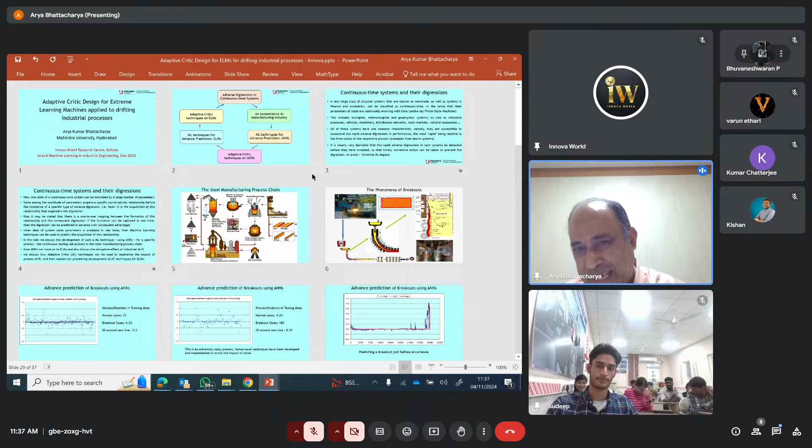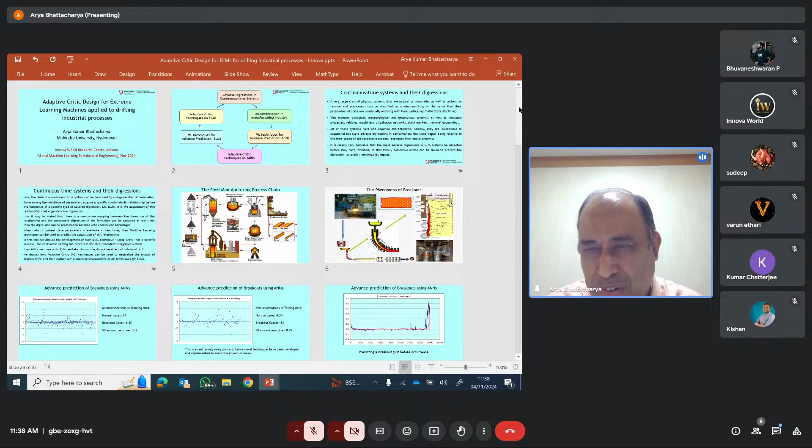I would just like to start by saying that in this presentation there are actually two parts. The first part deals with, although this is the beginning of the presentation, I'm going to start with something which is coming towards the last quarter of the presentation, which talks about generalities in application of artificial intelligence in manufacturing. Then I will come to a specific instantiation of this in a specific example, which I think you'll find interesting and also quite informative. So let me start.

So here we're going to talk about application of AI in manufacturing. Before getting into that, I think we should all first have an understanding of what AI implies.

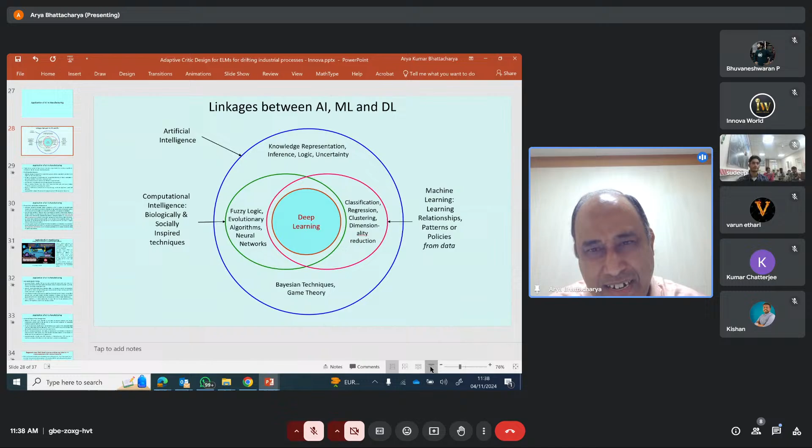In this diagram, we have the outermost circle, which is artificial intelligence, and you see that it is colored blue. The border is blue, and that includes certain elements which are subsets of that bigger set. And those are some elements which are not within those smaller subsets, like knowledge representation, inference, logic, uncertainty, Bayesian techniques, game theory, and quite a few others.

The rest of the matter, there are two elliptical subsets: one colored pink is machine learning, and the other colored green is computational intelligence. You also see them overlapping, and in the overlap there's something called deep learning. So now you understand what deep learning is, which is flashed around the media all around the place.

In machine learning, basically we are learning relationships, patterns, or policies from data. Here we talk about classification, regression, clustering, dimensionality reduction, and so on and so forth.

Computational intelligence are basically biologically and socially inspired techniques—you can say naturally inspired techniques. This involves areas like fuzzy logic, evolutionary algorithms, neural networks, and a few others. Deep learning is something which deals with neural networks and data, so it is the overlap or intersection of computational intelligence and machine learning.

Let's proceed further. I would also like to say that generally the organizers have a policy that probably questions are only towards the end, so I don't want to violate that policy. But normally, as a teacher, when I take class, I tell my students to fire questions whenever they find something they're not understanding, instead of keeping it in their stomach. Anyways, I think that will not work here based on the organizer's policy.

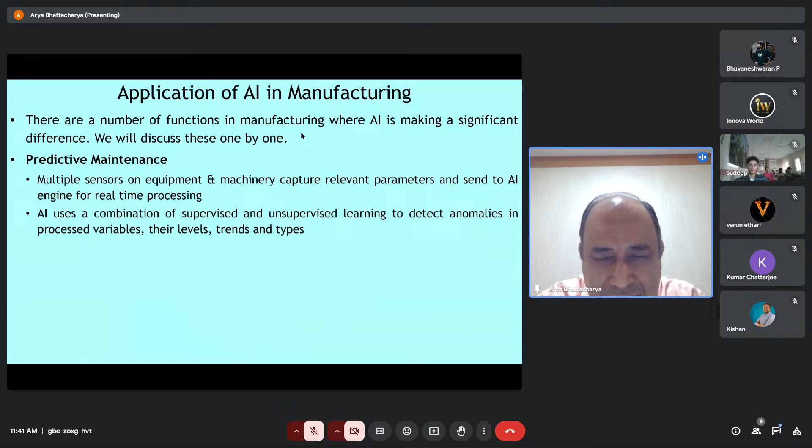I have not discussed what supervised and unsupervised learning are—I think we'll skip that, because if I start on it, it'll take the whole day. The generated values from either of these two types of learning are used at three different analytical levels.

At the lowest level, it enables monitoring of all equipment and machinery. Point number two, it predicts failures, their time in the future, and their type, and hence enables corrective maintenance precisely when needed. When we predict failures in the future, that is actually called prognostics.

Prognostics is different from diagnostics. Diagnostics is analysis when something has already happened. Prognostics is predicting what is going to happen and when it is going to happen. Finally, it facilitates an optimal maintenance strategy across all equipment, personnel, and costs, expected to reduce about 10% annual maintenance costs and 20% of equipment downtime.

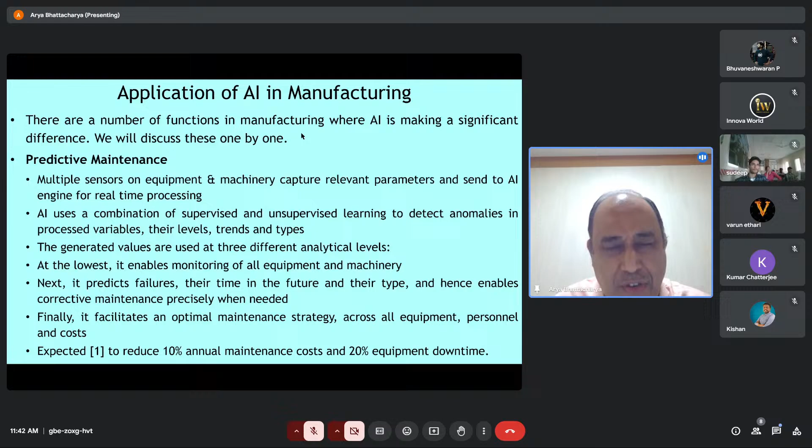I would just like to add, by the side, that when we talk of prediction, we predict not only machinery—we also predict the condition of processes. We'll talk about these as we go along.

Productivity and quality enhancement: individual operating processes within a production chain in process or manufacturing industry can have operating conditions or operating regimes of high productivity and product quality, of low productivity and low product quality, accompanied by instability and various intermediates. Each of these regimes of operation is characterized by specific combinatorial relations between different running process parameters.

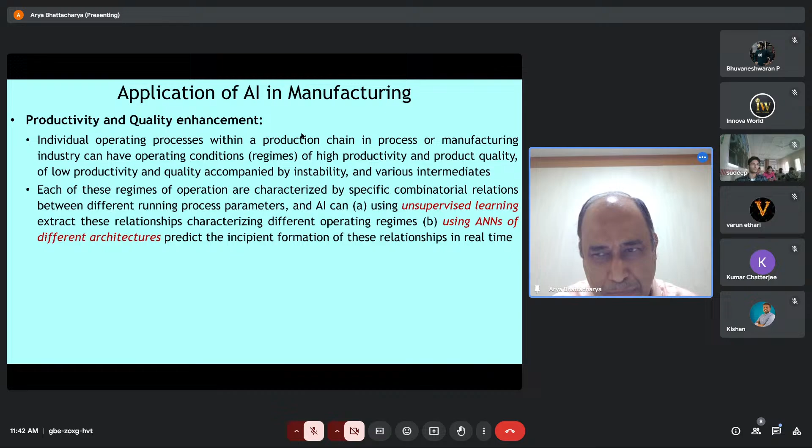AI can, using unsupervised learning, extract these relationships characterizing different operating regimes, and using ANNs of different architectures, predict the incipient formation of these relationships in real time. By control and corrective actions specific to the domain of the operating process, the processes can be prevented from degrading to unstable conditions, or taken to higher levels of productivity and quality.

So here we are talking not only about processes that are going to degrade, where we predict in advance and take corrective actions. There's also an alternative where we try to find out the best operating conditions in terms of productivity and product quality, and minimize cost. So the final product quality and productivity of the complete chain depends on optimization across individual processes, where the optimal process parameters can be extracted using multi-objective optimization.

Let me stop for a moment. When I say complete chain, most of the time manufacturing is not one single unit. It can be, but then those are very small setups. Usually in manufacturing, we have a chain of processes starting with some kind of materials and ending with a final product, with many transformations in between, like links of a chain. The final product quality and productivity of the complete chain depends on optimization across individual processes or links in the chain, where the optimal process parameters can be extracted using multi-objective optimization, and the individual processes run at optimal conditions using the above mechanisms.

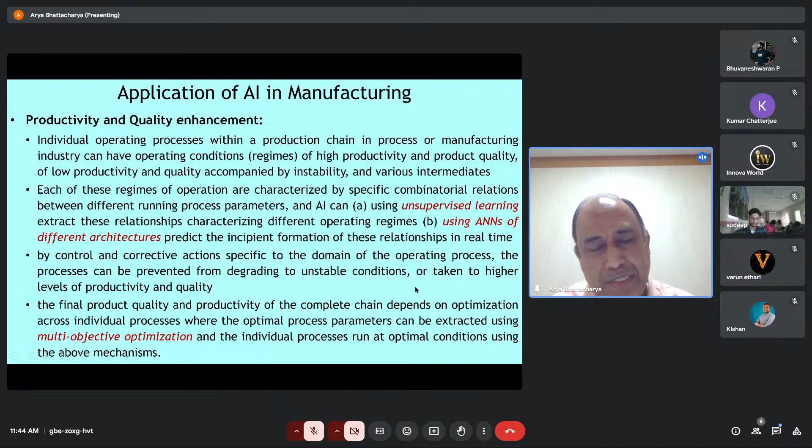Another small point we should be aware of, since we are dealing with manufacturing, is that there are broadly two classes of products. One is continuous product and the other is discrete products. If you have semiconductor chips, steel plates, or cars and vehicles coming out, those are discrete products. On the other hand, if you have oil and gas mechanisms or power being generated, these are continuous products. Just keep this in the back of your mind.

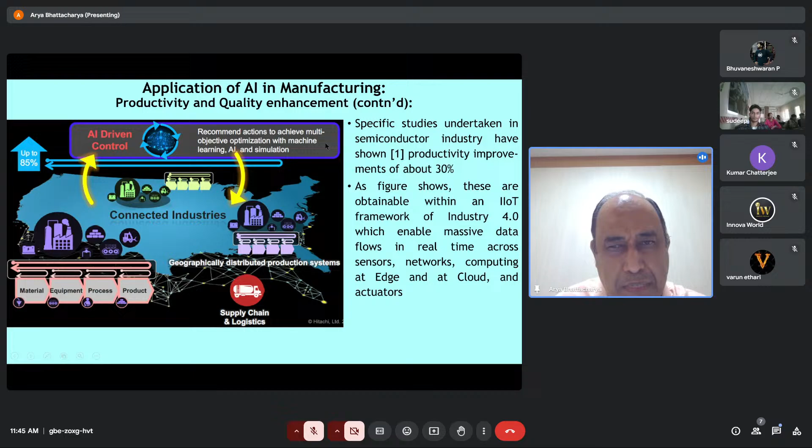As the figure shows, these are obtainable within an industrial IoT framework of Industry 4.0, which enables massive data flows in real time across sensors, networks, computing at edge and at cloud, and actuators. You see geographically distributed production systems and connected industries, with material, equipment, process, and product all supervised or controlled by AI, which recommends actions to achieve multi-objective optimization and machine learning through AI and through simulations. That's the idea I'm talking about.

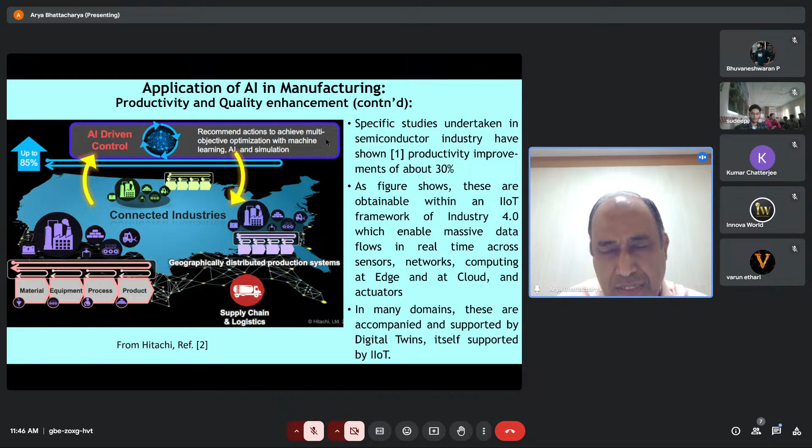In many domains, these are accompanied and supported by digital twins, itself supported by IIoT. Digital twins is another very interesting concept, but I won't talk about it here—possibly this is a good topic for a series of lectures or a workshop like this.

Then we have talked about condition monitoring, and improvement of products and processes. Then we have automated quality testing. Automated product quality testing has been around for some time now, using non-destructive visual testing of products across a range of industries.

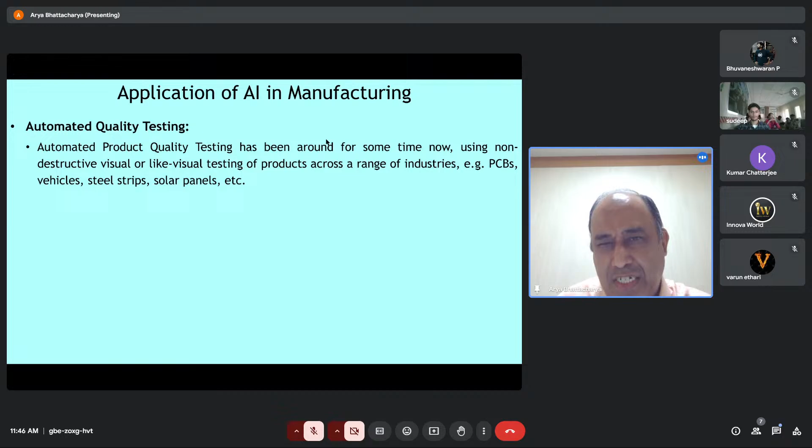Like you see with solar panels, steel strips, vehicles, and so on. Using AI, particularly deep neural nets like CNNs, it is possible to test in the production line itself for defects by abstracting away variations due to light intensity, color shades, orientation, background, etc. I don't know how many of you are familiar with CNNs.

With CNNs, you do not need to do feature engineering. You put in inputs and it automatically learns which variables are more important and which are less important. You can also have a lot of variations—for example, an image does not have to be of a particular intensity, color, or orientation. All these things are learned by the CNN automatically.

This obviates the need to take away samples for offline testing, which delays the complete process chain, and also ensures complete coverage of the product and the highest accuracies. CNNs have, since 2016, beaten human accuracy levels in image classification.

2016 is quite some time back, actually. Many developments have taken place since then.

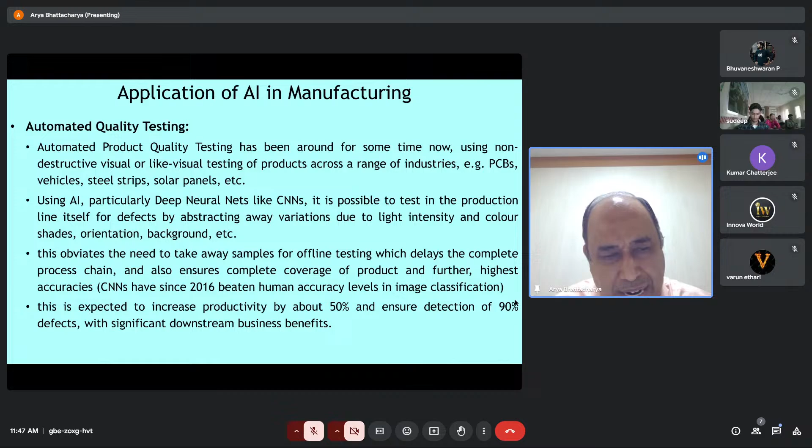This is expected to increase productivity by about 50% and ensure detection of 90% of defects, with significant downstream business benefits.

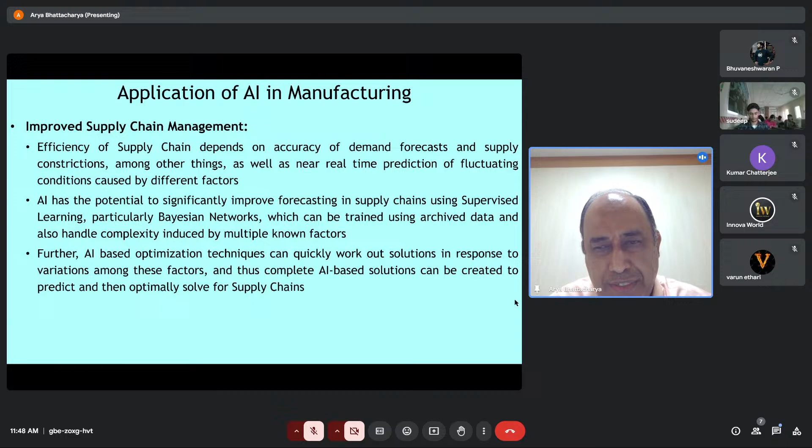Then we have improved supply chain management. Efficiency of supply chain depends on accuracy of demand forecasts and supply constrictions, among other things, as well as near real-time prediction of fluctuating conditions caused by different factors. AI has the potential to significantly improve forecasting in supply chains using supervised learning, particularly Bayesian networks, which can be trained using archived data and also handle complexity induced by multiple known factors. Further, AI-based optimization techniques can quickly work out solutions in response to variations among these factors, and thus complete AI-based solutions can be created to predict and then optimally solve for supply chains.

Expected benefits include a significant 50% reduction in forecasting error, 50% reduction in inventory, and about 65% reduction in lost sales due to product unavailability. So these are things which actually impact the producer of materials.

So now we go into something else, slightly deviant from what we have been talking about: suggested steps that manufacturing entities may take for AI implementation with maximal benefits. I don't have a complete profile of all the audience, but this would be particularly relevant for those engaged in the manufacturing industry and in operations management of manufacturing. So with the business benefits of AI implementation quite apparent, the obvious question is, how does one systematically implement AI company-wide for optimally achieving these?

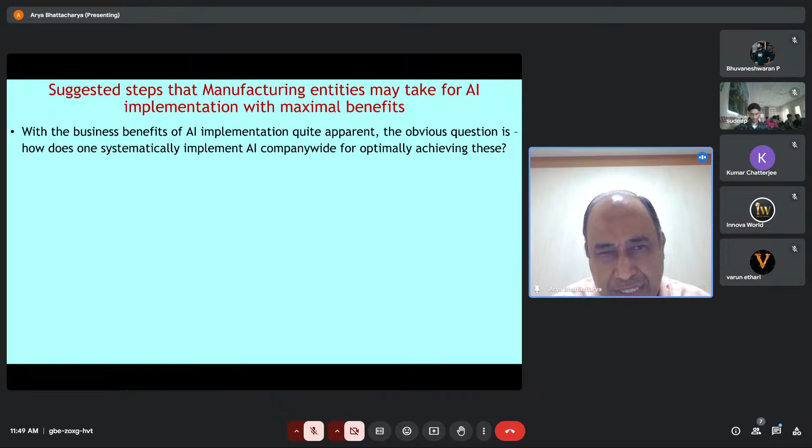For example, if you are in charge of or looking after a complete production chain of some product, whatever it may be, either continuous or discrete, as I talked about, you would like to see how you feed in artificial intelligence at different stages and extract the maximal benefits. The following 4 suggestions may be considered.

Work out a few targeted areas within the entire manufacturing process chain where AI may be first implemented, based on the discussed 4 application areas and possibly using the theory of constraints.

Now, theory of constraints is something that was propounded by someone called Eliyahu Goldratt, and he has become very famous and is a consultant for a lot of industries globally.

So the basic idea of the theory of constraints, cutting out all the other things, is that if you have a chain, and you want to maximize the productivity of the throughput through that chain, the first thing you should do is find out which is the number 1 point of constriction or bottleneck, and work around it so that that bottleneck or constriction is removed or expanded.

Once that is done, your potential or capacity of your chain has improved, and then it gets stuck at the next bottleneck or constriction. So work around that and expand that constriction. That is the way this theory of constraints is supposed to work.

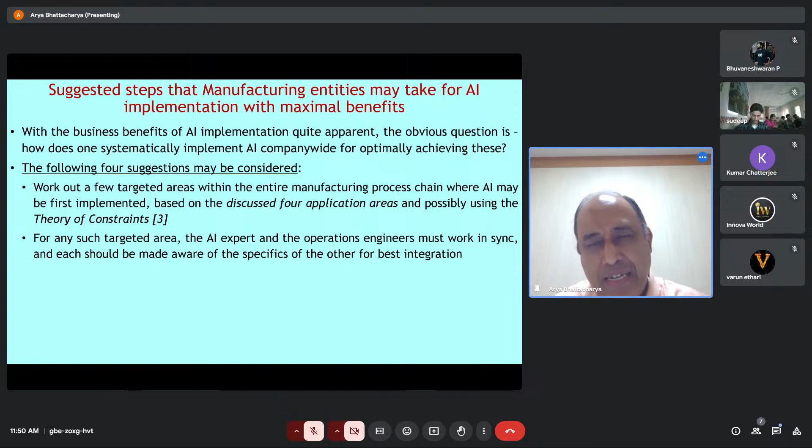So for any targeted area, the AI expert and the operations engineers must work in sync, and each should be made aware of the specifics of the other for best integration. Now, this is a very important thing. You see, one cannot really implement AI gainfully by just having an AI expert and giving it to him to try to improve a process, because a good deal of domain insight is needed for improving the process as well.

In the example that I've deliberately selected, you'll find how important it is, both for AI awareness and the mathematics and theory behind it, as well as for the domain expertise, which only the domain expert will be aware of. Only if the two work in sync can we really expect some breakthroughs. If the operations engineers alone learn AI from somewhere, they will not be able to do it by themselves either.

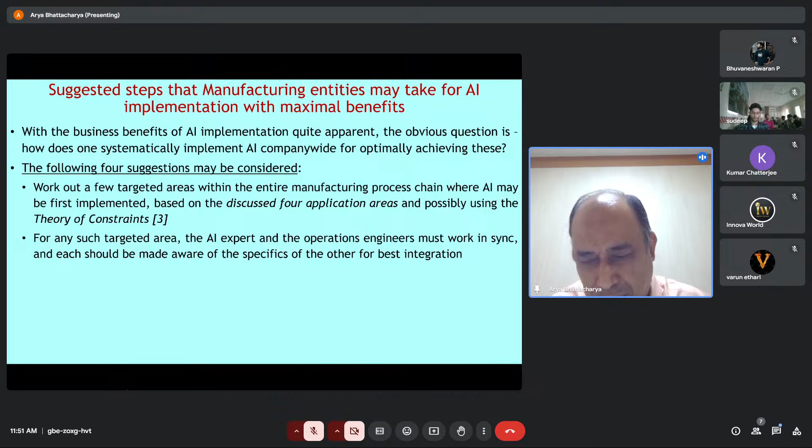Data is a critical player, and traditional relational databases will hardly help in the Industry 4.0 framework. One has to move to, I think this is now well known, like you've heard of big data and things like that. So one has to really move on to NoSQL-based frameworks.

And then aim for agility by first using simulation-based pilots, which enable faster convergence to meta hyperparameters of the AI system design, followed by online plant validation trials in safe parallel mode, and finally implementation. Usually in a running process, no one would like to take the risk of implementing a new system when the system is apparently going well, but one wants further improvement.

In this case, one actually creates a parallel implementation where the actual control or monitoring is done by the existing system, but the AI-based system is also put in place so one can compare how it is predicting or controlling versus what is actually going on. After a few months, one would take the decision whether the AI system is behaving better and replace the existing system with the better one. So these are the ways in which one actually goes about implementing AI-based systems.

Well, there's not much point in my reading through these, so let me leave this out. This is about the first part. I went through it faster than I thought — I thought I'd take half an hour, but I finished in 20 minutes.

Are there any questions about these, or am I allowed to ask the audience for any questions at this point in time?

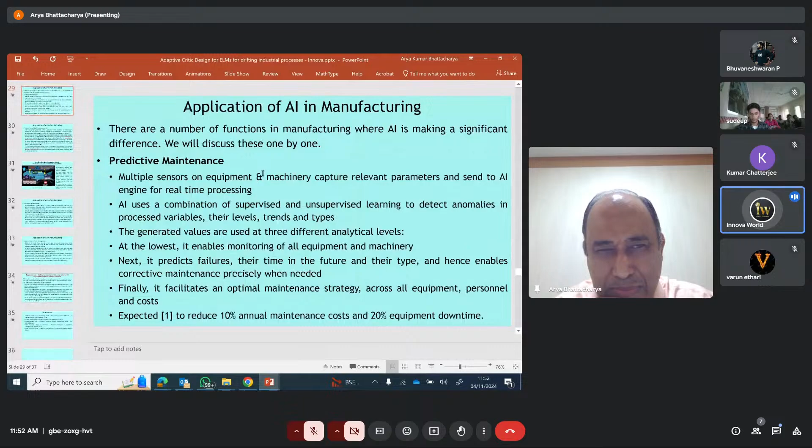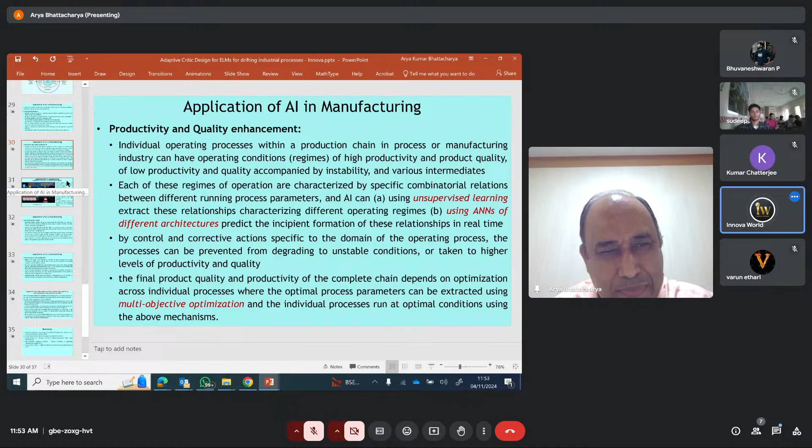Sir, half of... Hello? Yes, sir, am I audible to you? Yes, but there's a slight echo, that's all right. Actually, half of the audience are live, so you can drop a question. Meanwhile, let's wait and see whether the audience are able to answer. Okay, so my remark here is that I have finished the first part, which is the generalities of application of such machines. We don't have any question. Okay, so I'll move on to my main topic. Right, sir.

So here I'm going to talk about adaptive critic design for extreme learning machines applied to drift in industrial processes. Let's not be too floored by the kind of words used — adaptive critic, extreme learning machine, and all that. I'll gradually explain all these things as we go along.

So what do we mean by adverse digressions? When we have continuous time or dynamical systems, sometimes they tend to behave differently and it brings down their level of performance. I'll explain this in more detail down the line. In continuous time systems, which are ubiquitous across most things in the world, there can be adverse digressions, and there are ways of taking care of these.

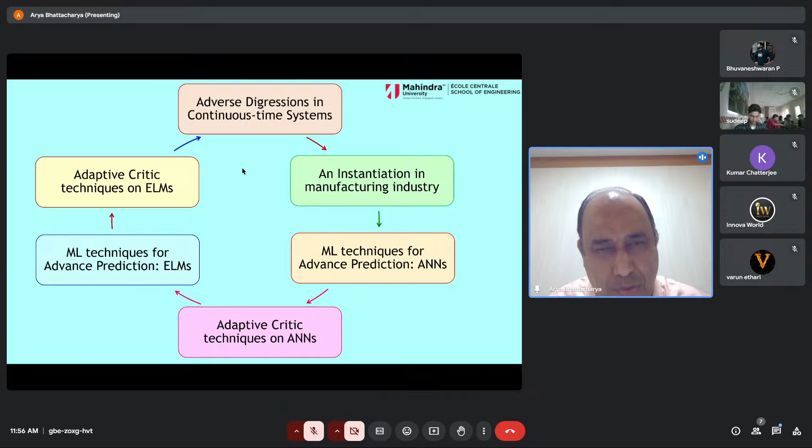Now, when this work was done, it was done for the very first time, because adaptive critic techniques did not exist in ELMs. We also filed patents and have a number of papers around this as well. So let me now get into more understandable things.

A very large class of physical systems, natural or man-made, as well as systems in finance and economics, can be classified as continuous time, in the sense that their state parameters are continually evolving with time, unlike, say, finite state machines. I hope you understand what state parameters are — basically, whenever you have any dynamical system, there will be a lot of variables associated with it.

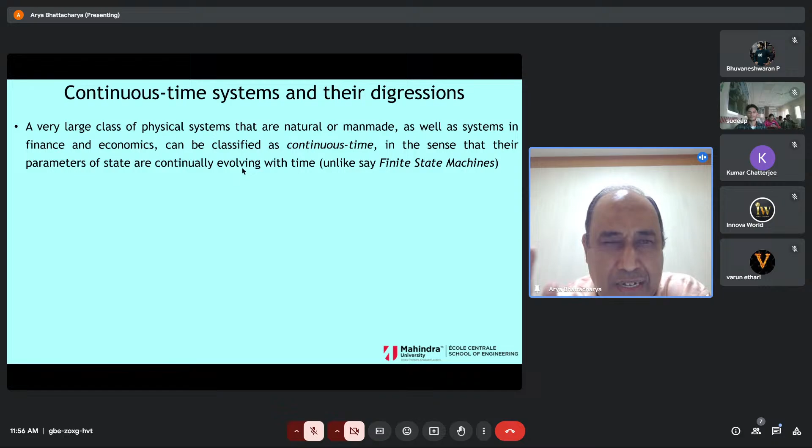If you look at the variables at any snapshot in time, they tell you the state or the condition of the particular process at that point in time. And that is why these are called parameters of state.

This includes biological, meteorological, geophysical systems, as well as industrial processes, vehicles, machinery, distribution networks, stock markets, national economies. All of these systems have one common characteristic: they are susceptible to occasional but rapid adverse digressions in performance, the word rapid being relative to the time scales of the respective process.

For example, in steel manufacturing there's an industrial process called a blast furnace - we'll have a look at that in one of the slides. In a blast furnace, the time scales are of the order of hours, or maybe 45 minutes or so.

On the other hand, we have electrical distribution grids, and there your time scales are of the order of milliseconds. So when we say all these systems are susceptible to occasional but rapid adverse digressions in performance, relative to their respective time scales - a blast furnace may get into a different state over many hours, whereas an electrical distribution grid or network can go down in just a few seconds.

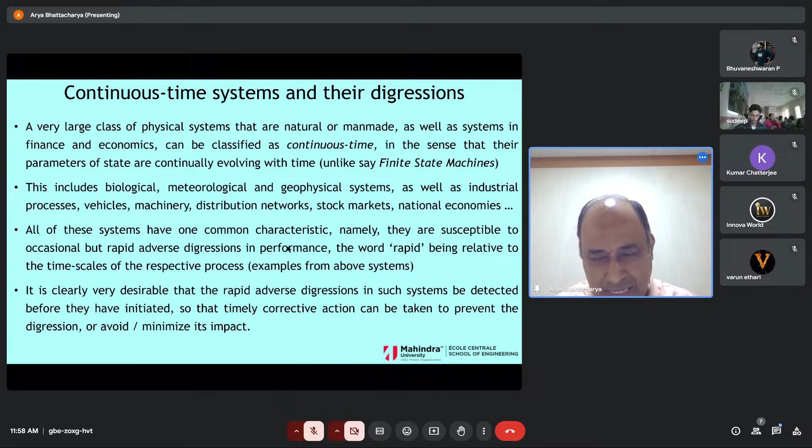It is clearly very desirable that rapid adverse digressions in such systems be detected before they have initiated, so that timely corrective action can be taken to prevent the digression or minimize its impact. I think all of this is understandable.

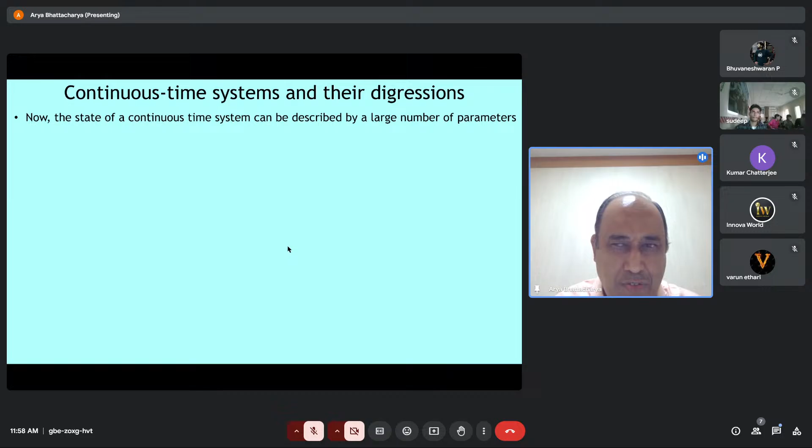Now, the state of a continuous time system can be described by a large number of parameters, and as we said, these are parameters of state. Some among the multitude of parameters acquire - now this is very important, and I think it's a bit abstract for us to think about.

Some among the multitude of parameters acquire a specific combinatorial relationship before the incipience or start of a specific type of adverse digression, that is a fault. It is the acquisition of this relationship by a subset of all the parameters that engenders or creates the digression.

I hope the part written in italics is understandable. Unfortunately, as I said in class, we keep getting feedback and I can see the faces - this is one of the major issues in online discussions, we cannot see the faces of the students. Of course here it is not just students, it's the audience.

So this is a very important thing - let me repeat it for the sake of its importance: whenever we have an adverse digression like a fault coming up, it is some of the state variables that acquire a specific combinatorial relationship that creates a specific type of fault.

Thus it may be stated that there is a one-to-one mapping between the formation of this kind of relationship and the consequent digression. If the formation can be captured - now this is again very important - if the formation can be captured in real time of the process, then the digression can be predicted in advance with consequent advantages.

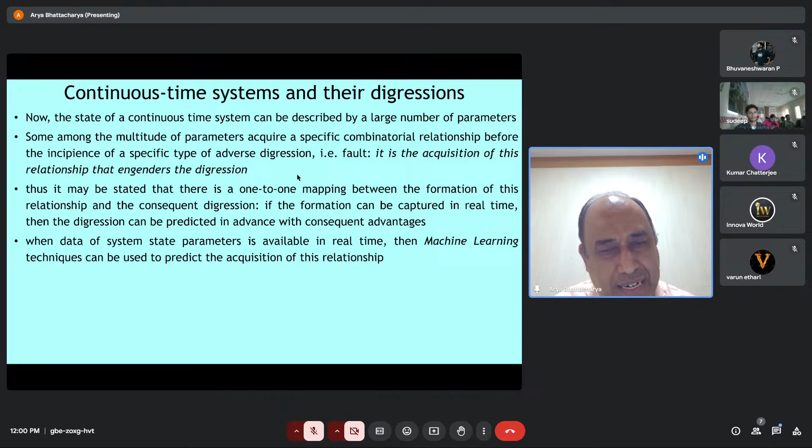When data of system state parameters is available in real time, machine learning techniques can be used to predict the acquisition of this relationship. In this talk, we discuss the development of such a machine learning technique using ANNs for a specific process - the continuous casting sub-process in the steel manufacturing process chain.

From ANNs, artificial neural networks, we move on to something called extreme learning machines, which is actually a cousin sister of ANNs, you could say, and also discuss the disruptive effects of industrial drift - we'll talk about industrial drift down the line. We discuss how adaptive critic techniques can be used to neutralize the impact of process drift, and then explain our pioneering development of adaptive critic techniques for extreme learning machines.

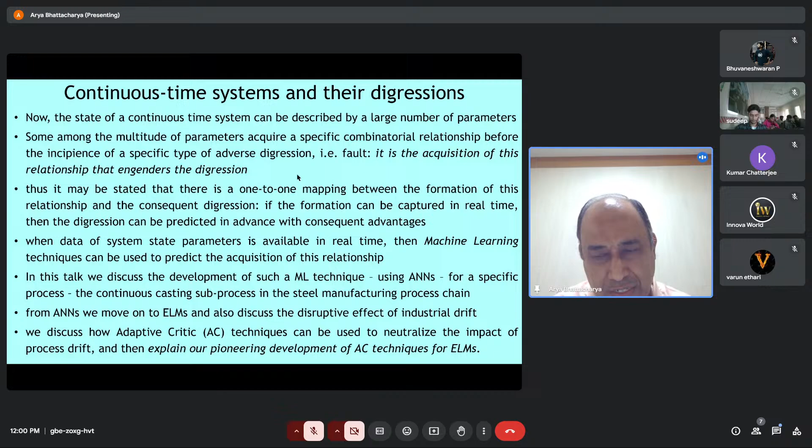Essentially what happens in the core part of a steel manufacturing process is that the oxygen part of iron ore is stripped off from the iron using some kind of reduction techniques, which could be based on coal. Most of the plants today are based on coal.

However, it could also be based on other reduction agents like hydrogen, for example. And that is what is supposed to be called green steel, and gradually it is getting more and more popular down the line, but still makes a very small percentage of net steel production.

Now, steel is a 100% recyclable material. So on the one hand, while you can actually pull out the iron and corresponding steel from the earth, from the minerals, you also have a lot of existing stuff like, for example, cars or other kinds of steel materials like construction material, which also go into scrap. And then from the scrap, it is actually called recycled steel. That is also one of the inputs into the production of steel.

Okay, then there are different stages. You have to keep in mind that whatever is coming out of the blast furnace is in liquid form. It is liquid iron because it is mixed up with many impurities. Then there are some processing stages, all at the liquid level of the steel or iron, where number one, you remove as many impurities as possible, and number two, based on customer preferences, you alloy or create new properties in the steel by alloying with different metals. All of this is done at the liquid stage.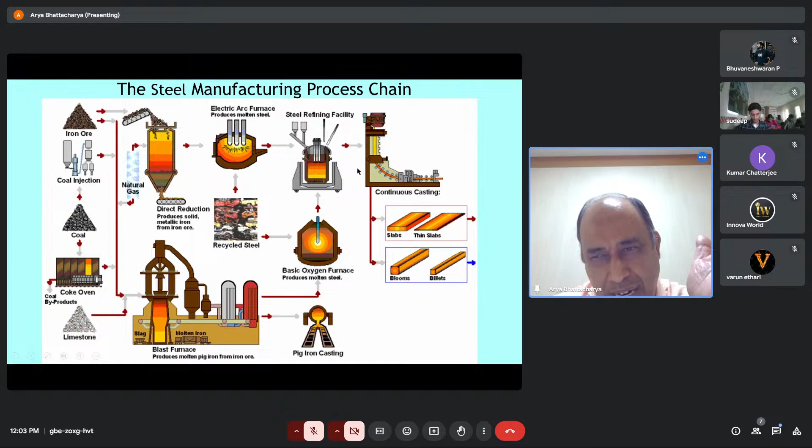Then from the liquid stage, you transit to the solid state, and that is done through something called continuous casting. In my next slide, I'll blow up this part of the continuous casting. The output of continuous casting is either slabs, for flat products like car bodies or white goods, or blooms or billets, which go into the construction industry. The former are called flat products, and the latter are called long products. Now, after this, there are rolling stages and annealing stages and all that, which is not contained in this particular slide because my idea was to focus on what is continuous casting.

Okay, so here we get a bigger view of continuous casting and also talk about the phenomena of breakouts that happen, or that potentially can happen, in continuous casting. So here we have, this is just a picture, but let's look at the schematic diagram.

So you have liquid steel coming in huge buckets. Here you have a view of the bucket in which the steel is coming. This is called a ladle. Actually, you don't see a human next to it, so you cannot make out what is the size. Generally, a ladle is of maybe a diameter of about 2.5 meters and a height of about 4 meters. So you can make out how huge it is.

So the core part of, okay, from the ladle, the ladle actually brings this liquid steel and drops it into a kind of a buffer, which has got some jargon called a tundish. It is put into this tundish, and then from here it is actually sent into what is called the cooling mold. Now this cooling mold is a core part which converts the liquid into the solid.

And when it converts into the solid, it also takes on the shape of the mold. So if you look at a mold from above, it looks like this, broad shape, so it's a rectangular shape, and then there's a certain depth. One continuous casting mold would be of the order of, say, 1.5 meters wide, now I'm talking very generally, there's a lot of variation, okay? Maybe of the order of 200 millimeters thick and of the order of 1 meter in depth. So this is the depth direction, shown here as Z, this is of the order of 1 meter.

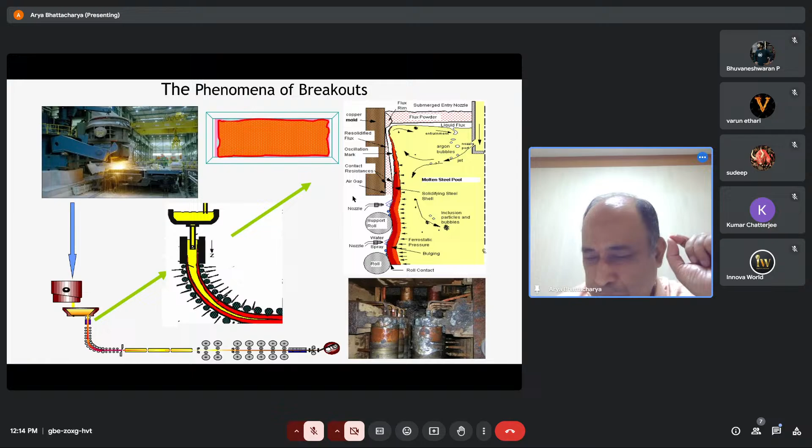Let's just look at it in a different way. I've actually skipped many other things that have been done in between, and they have been published elsewhere. I'm just going to come to the end of those calculations, and we are saying that we have developed an ANN which predicts breakouts in advance.

What we are trying to do is, first, we are not getting into the breakout aspect of it. We are just trying to say that before a breakout is likely to occur, we are trying to predict the divergence of the system. Let's try to understand what we are talking about.

We say that there's a continuous casting process running, and if the process is absolutely normal, this ANN is going to give an output of 0. On the other hand, if there's a process upset, like a breakout is actually going to take place, then we say the output is going to be 1.

But the ANN does not always give either 0 or 1. It gives a whole range of values between 0 and 1. So we set 0.5 as the intermediate, and we say that if the output from the ANN is below 0.5, between 0 and 0.5, the system is normal. When the output is between 0.5 and 1, then a breakout is likely to occur, a breakout is about to occur, so preventive action has to be taken — not that a breakout has actually occurred.

We have got literally hundreds of cases where we have basically taken screenshots or snapshots in time, taken the inputs, generated the outputs, and then compared them with the actual situation.

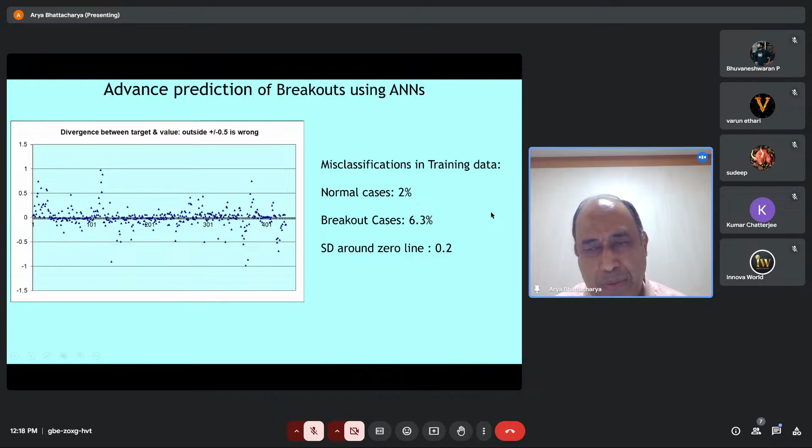Standard deviation around the zero line is 0.2. Now this is from the ANN that we talked about.

What do you mean by noisy process? That there's a lot of fluctuation in the sensory inputs. Some of the inputs are sensory inputs, some are kind of inputs derived from input parameters, but then passing through many empirical relations. So anyway, this is an extremely noisy process.

Hence, novel techniques have been developed and implemented to annul the impact of noise. We will not get into that.

I have actually missed out some misclassifications in training data versus misclassifications in testing data. Now, whenever we move from training to testing, we would expect deterioration in accuracy levels. Normal in training case was 2%. Here in testing data, it is 4.3%, and breakout cases it is 18%. Standard deviation has become worse.

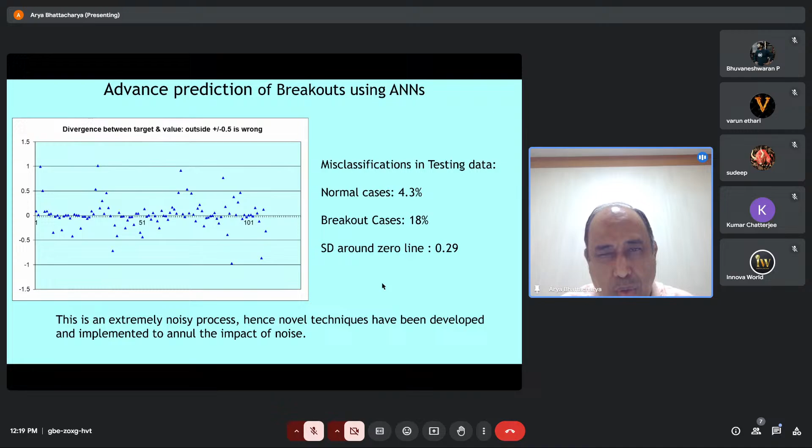Then we go to see what we are actually trying to do. This is what I'm trying to show you here. This is continuous data, what we have on the x-axis is time. On the y-axis, there are three different curves being plotted.

I'll not get into detailed description, just tell you about it. One is the moving average, or moving abnormality index. The abnormality index is the value that goes to 0 when it is absolutely normal, goes to 1 when it is absolutely wrong, otherwise it stays in between. So that is the abnormality index.

What is NICC? Let's not get too much into that, it's basically some kind of index of continuous casting, a normality index. The deep red line is the alarm. The alarm is actually generated using some kind of relationship between NICC and MAI.

You see that in the continuous process, these are actually 3600 which is 1 hour. So it has gone for about 6-7, 8-9 hours almost, and it has been continuously behaving well. But then towards the end, there is a deterioration in the entire process and there's a breakout about to happen.

Our system is alarmed with this value, which is coming to 1. So the alarm is either 0 or 1. We have raised an alarm before a breakout is going to occur.

Please understand that this is not data from Tata Steel where I had worked. Let me not get into from where it has been taken.

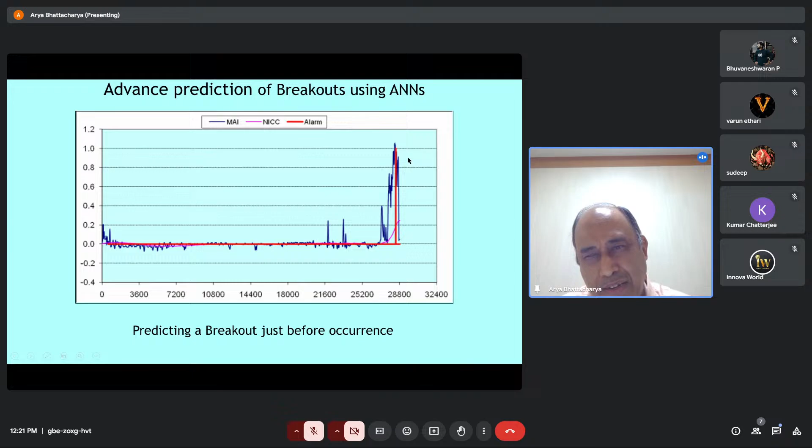Now remember, this was running in parallel, like what I talked about earlier. So we were not really controlling the system. If we were controlling the system, the breakout would not have happened.

Now here we are showing a different sequence. What I showed you, those 8 hours or so, that is one sequence of casting. After a sequence of casting, it is temporarily paused, the condition is changed, so one again starts a new casting sequence.

In this casting sequence, you find there are a lot of variations in the abnormality index. NICC has also been changing, fluctuating, but our system has never given an alarm unnecessarily, in spite of all these fluctuations. Another thing you notice here is casting speed, but that's not important. Our system was working quite well, fine-tuned from both aspects.

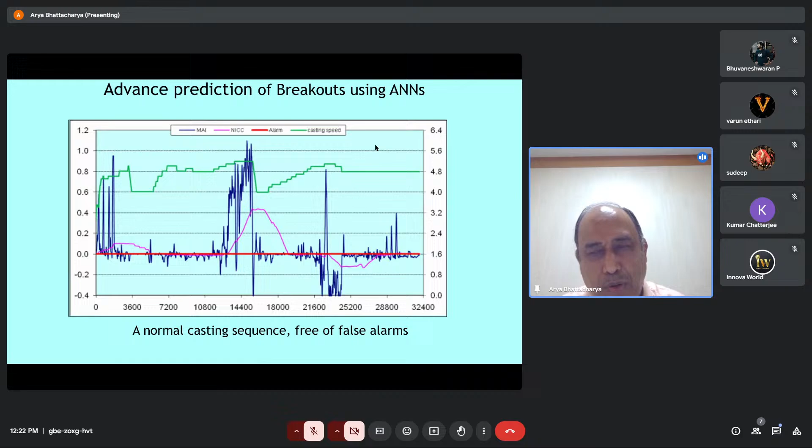Now comes the next issue: industrial drift and its impact on machine learning based analytics. When I started, I had mentioned that continuous systems drift. Particularly industrial systems drift very much. Now what do we really mean by the drift?

So drift basically means that if I give almost the same inputs as I had given, say maybe a month back - by inputs here we're talking of actual raw material inputs or processed raw material inputs - we get different kinds of output. The machinery or the process does not process the inputs in exactly the same way. That is what we call process drift.

All industrial systems drift due to the following reasons. One is wear of machinery. Two is changes in input materials. And three, if you look at a manufacturing system, you always have operations personnel who are continuously trying to improve the system - operations, experimentation, and continuous search for improvements. These three things together make an industrial system drift.

Now the question is, what really happens in machine learning? The corollary of this drift is that machine learning models trained to recognize combinatorial relationships among parameters based on past process data lose their accuracy into the future.

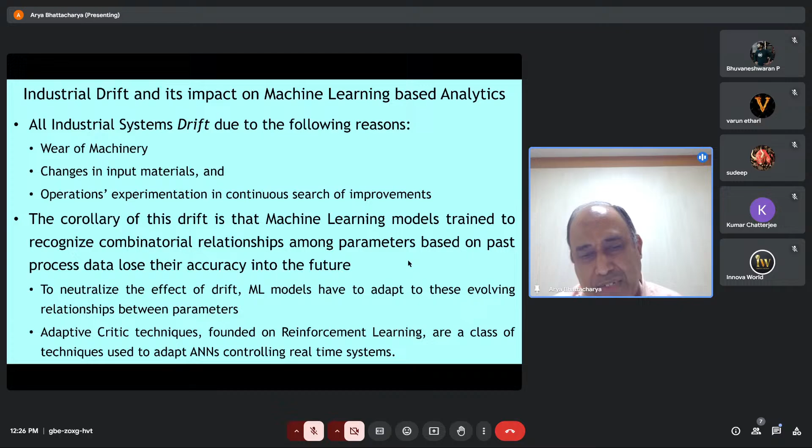So how do we do it? Adaptive critic techniques, founded on reinforcement learning, are a class of techniques used to adapt ANNs controlling real-time systems. Now we get into a little bit of mathematics, and I think some of you will start having a little difficulty understanding this, so I'll try to move a little faster now.

The basic idea of adaptive critic systems is to modulate the control parameters so as to minimize the quantity Ut, called the utility function, defined as follows. Don't get overwhelmed by any of these numbers - just see the fundamental part, forget the half. There's xt minus x-target-t, which is a vector since x is made up of a number of parameters. So we have xt minus x-target-t, and you can look upon Q as an identity matrix for a moment.

So you have x_t minus x_target_t squared, plus half of rho of u_t transpose. Now, what is u_t? U_t is actually the amount of control effort that is needed. So this capital U_t reflects how much is the deviation between the actual states created versus the targeted states.

And how much control effort goes into attaining that closeness or that distance. Now, those who have seen machine learning models and are aware of regularization would see an uncanny similarity between this error term, the mean square error term we see in supervised learning, when we impose L1 or L2 regularization. Rho is just a constant, some kind of coefficient of regularization.

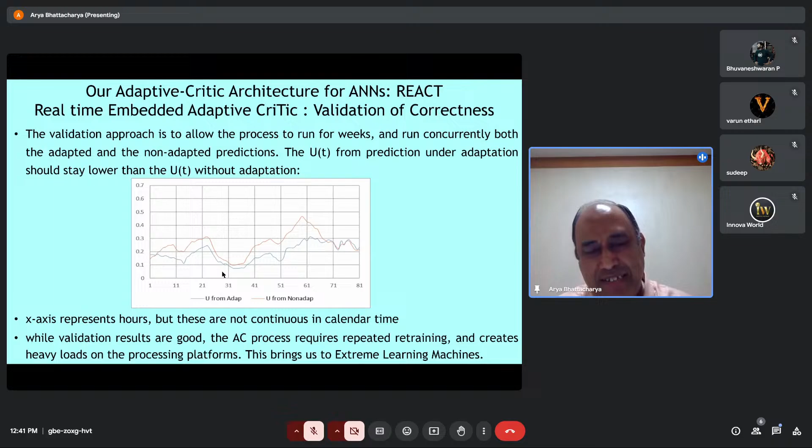So while validation results are good, the adaptive critic process requires repeated retraining and creates heavy loads on the processing platforms. And this brings us to something called extreme learning machines.

Now, I'm not going to get into the details of extreme learning machines. I'll only say that there are two major differences. Extreme learning machines are very similar to artificial neural networks, or you can say multi-layer perceptrons, if you are aware - I think you should be aware to that extent.

One of them is that the first matrix - so when I have 3 layers, I'll have 2 matrices: the first matrix between the input layer and the hidden layer, and another matrix between the hidden layer and the output layer. This first matrix is actually not trained. It is taken randomly, selected randomly.

So ELM is architected like multi-layer perceptrons with hidden layers and non-linear activation functions. The elements of the first weight matrix, the W's, are selected just arbitrarily, randomly, with some constraints.

Now please keep in mind that although we say randomly, there is also a lot of consideration for the randomness. One can have absolutely flat random, we can have Gaussian random, we can have different kinds of standard deviation in the Gaussian random, and so on and so forth.

The weights of the second matrix, the betas - you can just call them weights only - are then solved for as a function of the previous layer weights and obviously the training data itself.

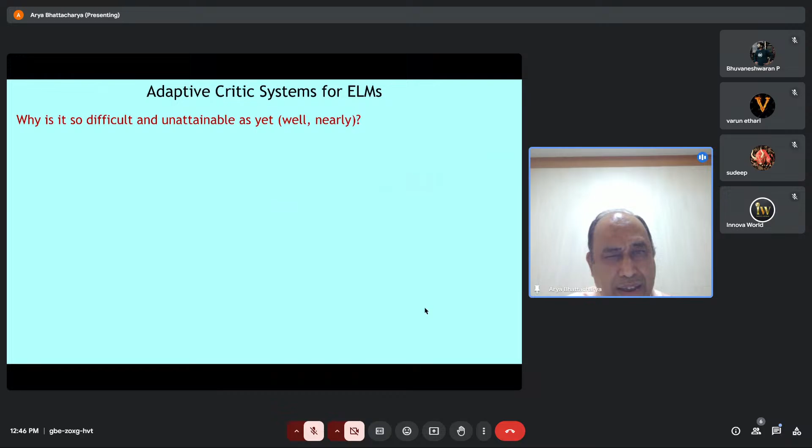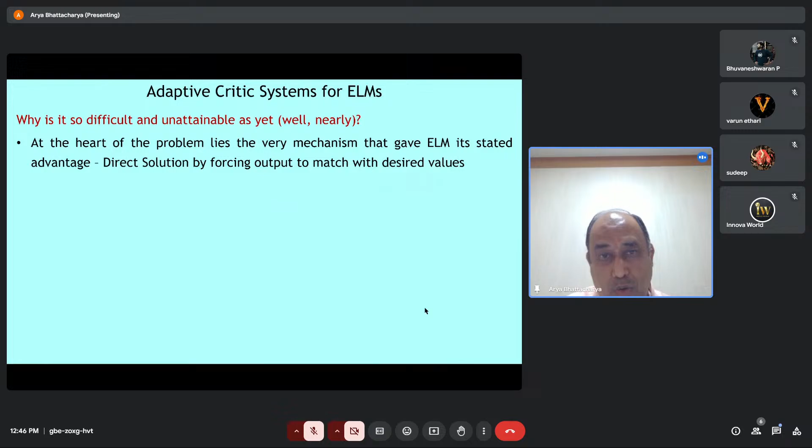So why is it so difficult and unattainable as yet? At the heart of the problem lies the very mechanism that gave ELM its stated advantage: direct solution by forcing output to match with desired values. The adaptive critic process, as seen in ANNs, cyclically updates the critic NN and then the action ANN, and this is enabled by the fact that the error between the cost-to-go functions J at consecutive time steps is iteratively fed back into the weights of these ANNs.

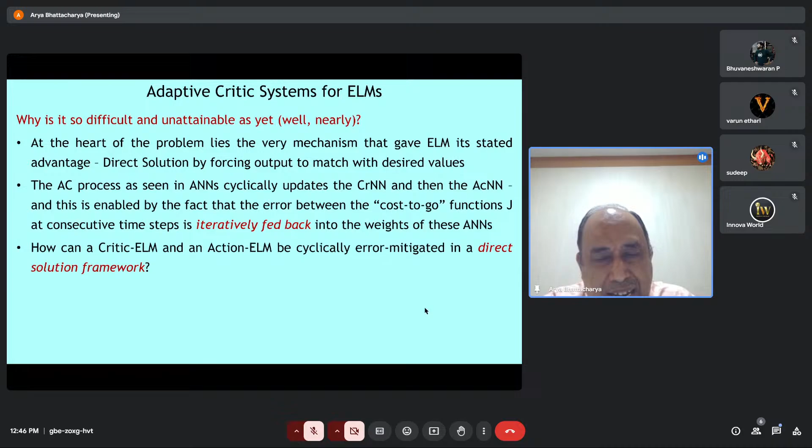How can a critic ELM and an action ELM be cyclically error-mitigated in a direct solution framework? To attain this, a new architecture and concomitant mathematical framework was created, which is explained next.

Now I've got just 15 minutes left. In the next slide, we shall focus on the illustration for the current time step. Just assume that a corresponding illustration for the previous time step also exists.

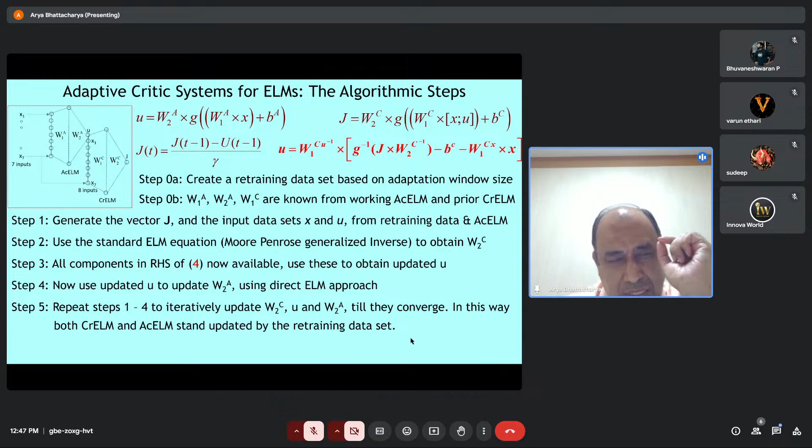I would probably try to avoid getting into these mathematical aspects because it will take much more time than I thought, or rather, I've consumed more time than I had in my quota. So I will just skip these aspects. I will just say that we developed, and this was a novel thing which has been patented and also published, the extreme adaptive critic algorithm for extreme learning machines. I'll skip these parts because I'm not sure how much has been understood so far, and it actually stands on the foundation that everything before this is fully clear.

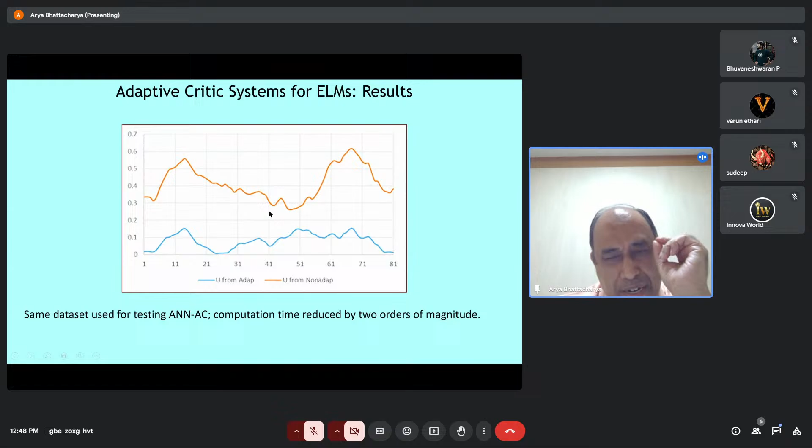So let me just give you the final results. Here, the validation is that we compare, across a sufficiently long period of operation, the value of U, which is basically used for prediction-minded purposes. So U from non-adaptive prediction, where I'm not adapting the value, versus U from adaptation. And I see that the U from adaptation is significantly less than the U from non-adaptation.

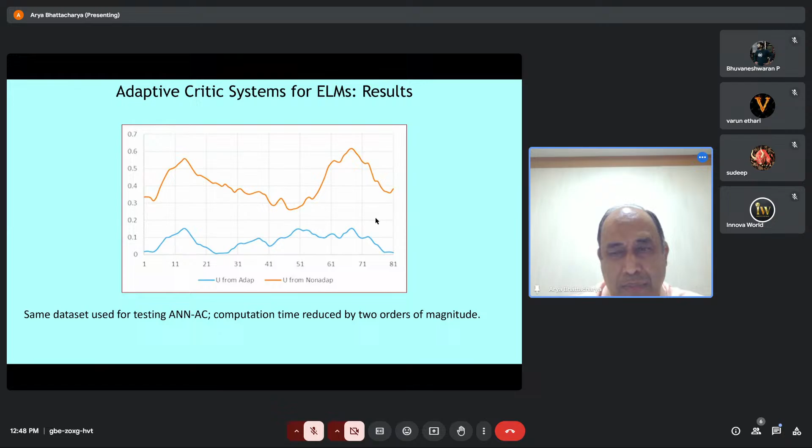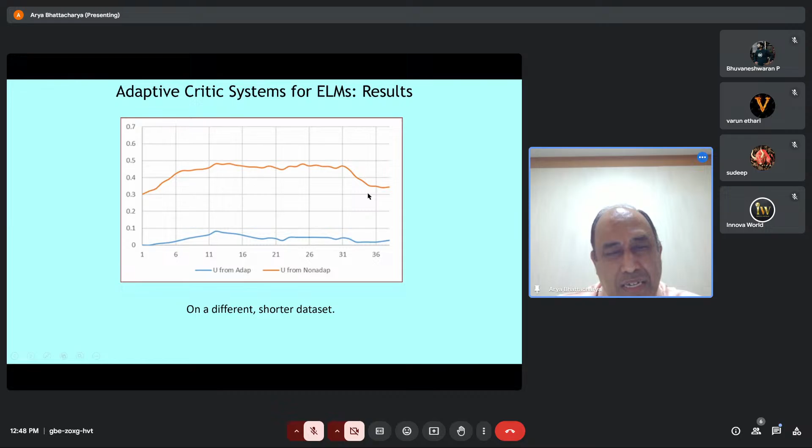And at the same time, I'm doing it for ELM, so it takes two orders of magnitude less time and effort to do this adaptation. This is done on the same case I did earlier, for about 81 hours. Then we took a second continuous case for about 37-38 hours, and we see the same kind of results: U from adaptation is much, much better than U from non-adaptation.

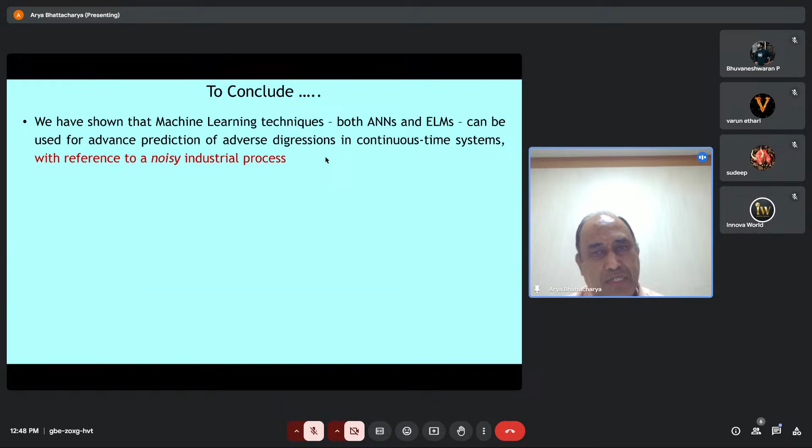To conclude, we have shown that machine learning techniques, both ANNs and ELMs, can be used for advance prediction of adverse digressions in continuous time systems, with reference to a noisy industrial process. In this context, we have shown that ELMs provide nearly similar accuracy levels as ANNs, but with significantly less training time.

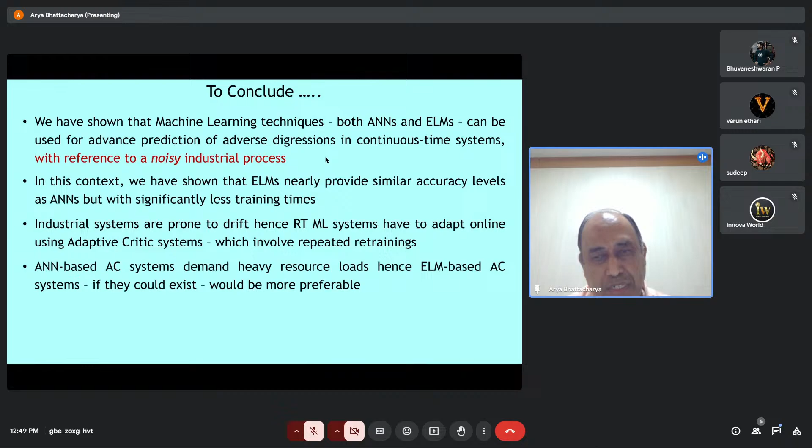Industrial systems are prone to drift, hence real-time machine learning systems have to adapt online using adaptive critic systems, which involve repeated retrainings. ANN-based adaptive critic systems demand heavy resource loads; hence ELM-based adaptive critic systems, if they could exist, would be more preferable. For the first time, we have developed and validated ELM-based adaptive critic systems.

Let me tell you, this was done six years earlier. So it's not that I have done it now and am presenting it now, because after all, this is supposed to be an exposition of the application of AI in manufacturing.

Returning to generics, the methodology developed here, and this is very important, the last statement, can be applied to predict adverse digressions in any non-stationary, or you can say drifting, continuous time system. We have seen a whole lot of examples; we talked of financial systems, we talked of economic systems.

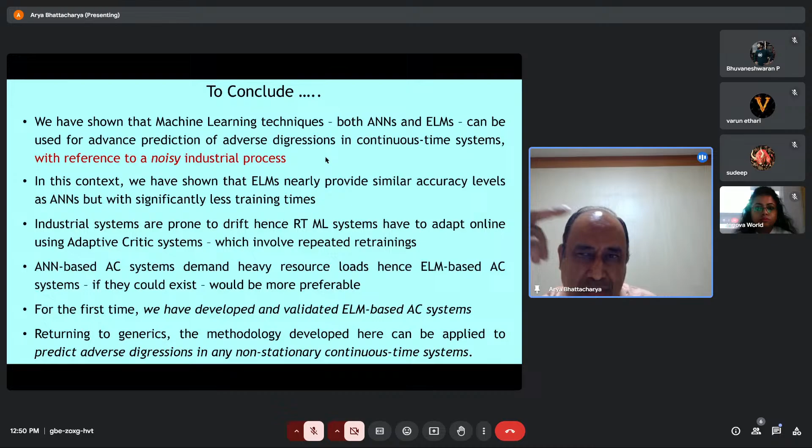We talked about metallurgical systems, geophysical systems, biological systems, electrical grids, or any kind of distribution networks. We talked of vehicles and manufacturing. Within manufacturing too, there is continuous output manufacturing and discrete output manufacturing. All of these, we have just instantiated in one particular case, but this can be applied in any other case as well.